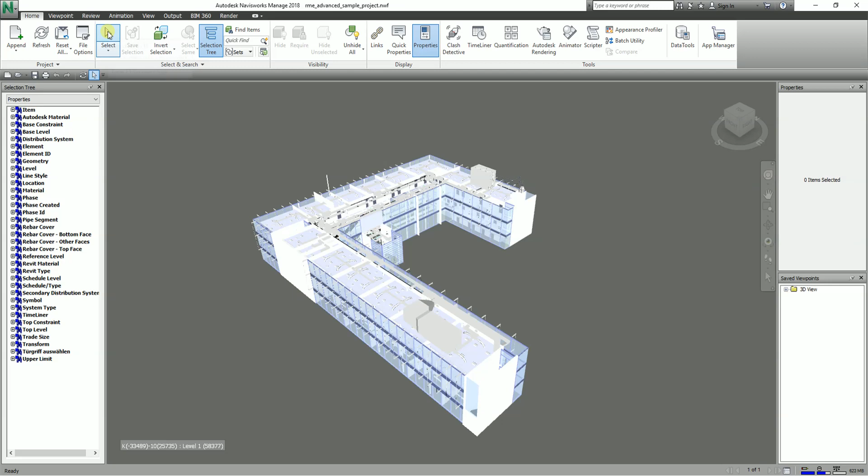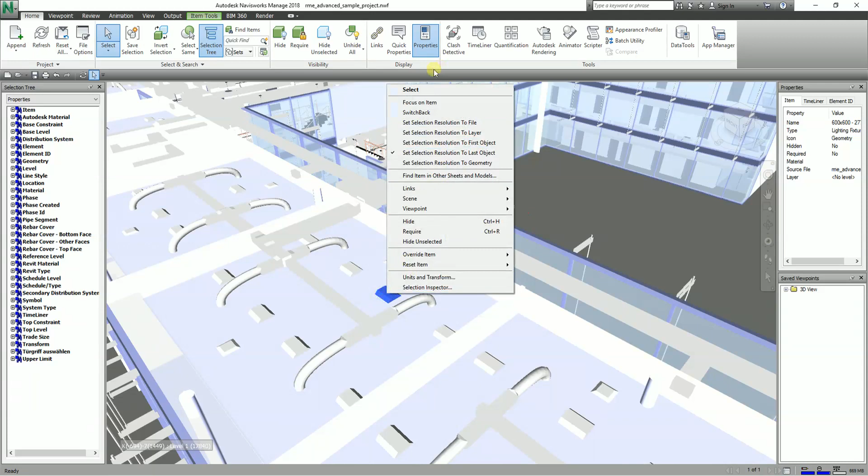The first one is Select. As you can see, Select is turned on. If you use that one, you'll be able to pick the objects one by one. Let's say I'm going to pick this, then right click. So there's the select there. If you want to select multiple elements, you can hold your Control key and then pick one by one.

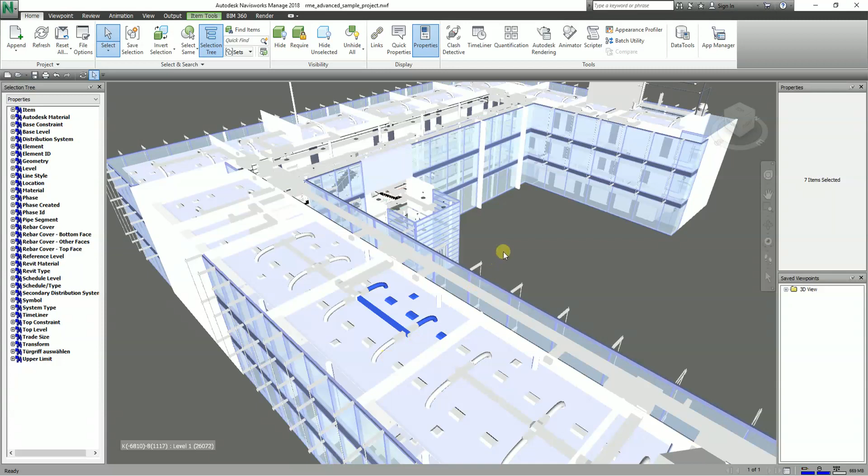Another way to select an object, aside from using the select tool which selects items with a mouse click, if you click the drop down arrow there's an option called Select Box. It selects items within a rectangular area. Let's say I want to select this area - I pick one point, drag, and release the left click. You'll be able to select the objects.

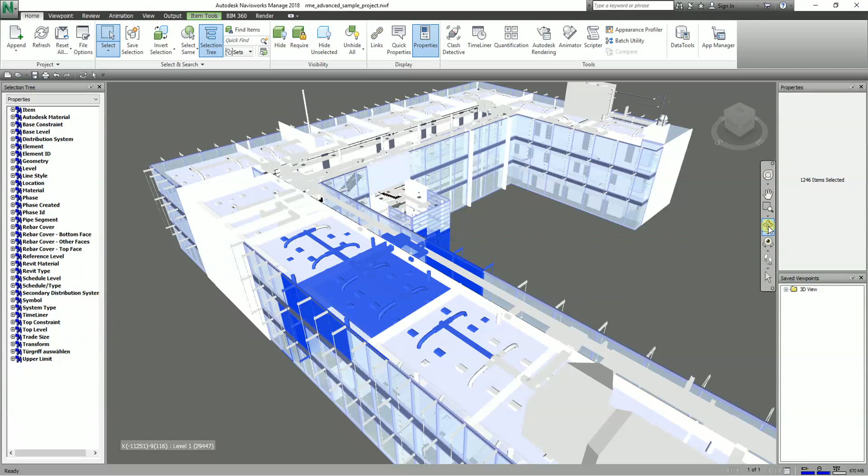I'll go ahead and select the Orbit tool to orbit my model, zoom out, orbit, and pan. Then I'll escape. Going back again, I'm going to click Select Box. Let's try again with this portion - I'm just going to drag like this. It's like AutoCAD.

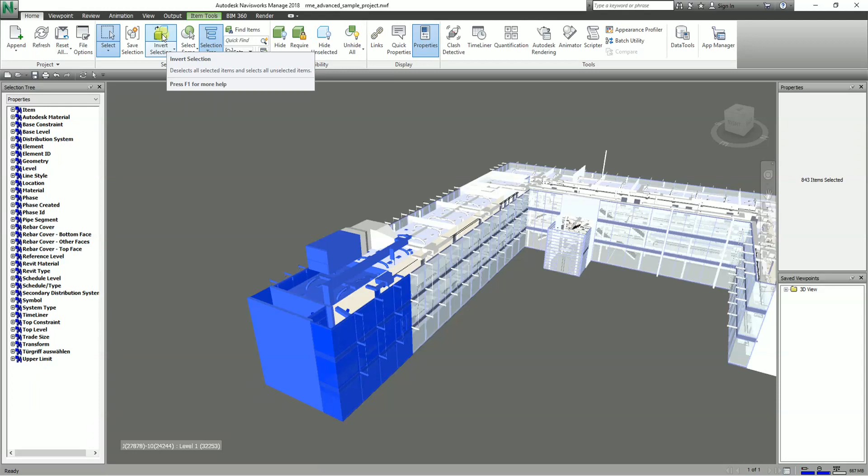There are other options here to select the object, like this Invert Selection option. It deselects all selected items and selects all unselected items. For example, the blue elements are selected. If I click Invert Selection, it will deselect all selected items and select the unselected ones. I'm just going to click this - you'll notice it selects all the unselected items but deselects the selected ones.

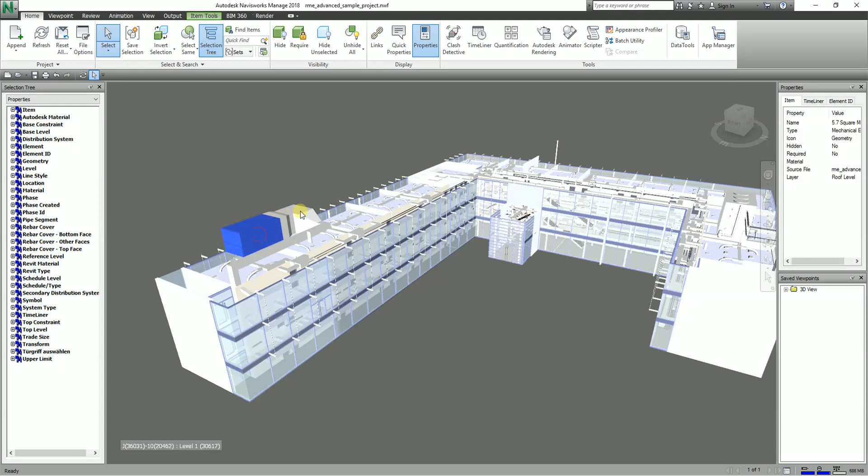Using the Select Box tool, you will not be able to pick one by one - if I try to pick, it doesn't allow me because this isn't the right tool for that. If you want to pick one by one, you click the Select tool. If you want to include other elements, hold the Control key and pick one by one. Then again, you can try Invert Selection.

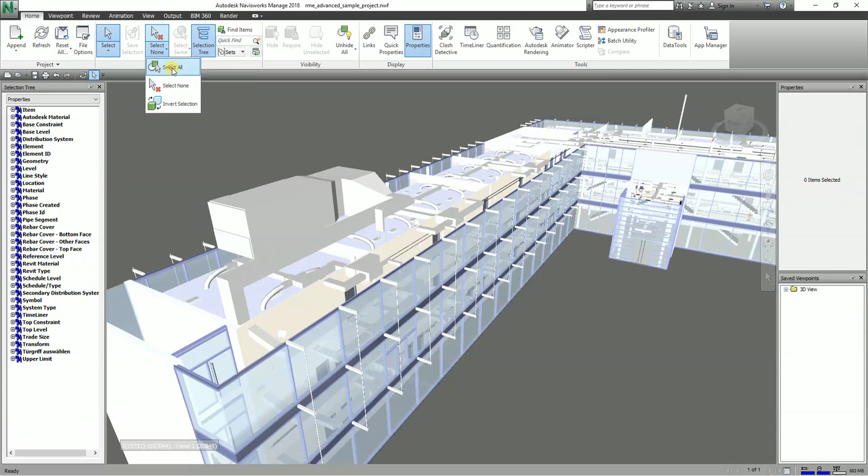You can also click the drop down arrow here - there's an option called Select None, which will deselect the object. Another option is Select All, so you can select all items in the scene if you want. If you want to deselect objects, you can select None, or simply press Escape.

Another option to select - let's say I'm going to select the Select tool and pick this one. By the way, you can go to the Home tab, Display panel. If you want, you can turn on Properties so that as you select an object, the properties will display for the selected object, just like the properties in Revit.

Aside from that, you can also use Quick Properties. You can toggle this on, so it displays property information in a tooltip style window as you move your cursor. Basically, if you turn this on and hover your pointer over an object, it will show you the properties of that object.

Okay, the item name is this one, 600 by 600 277. The item type is lighting fixtures.

Now, if you want to modify the quick properties, you can go to the application button, then options, and then interface. You just expand the interface, and then you can select quick properties there. You can expand this and click the definition to change this.

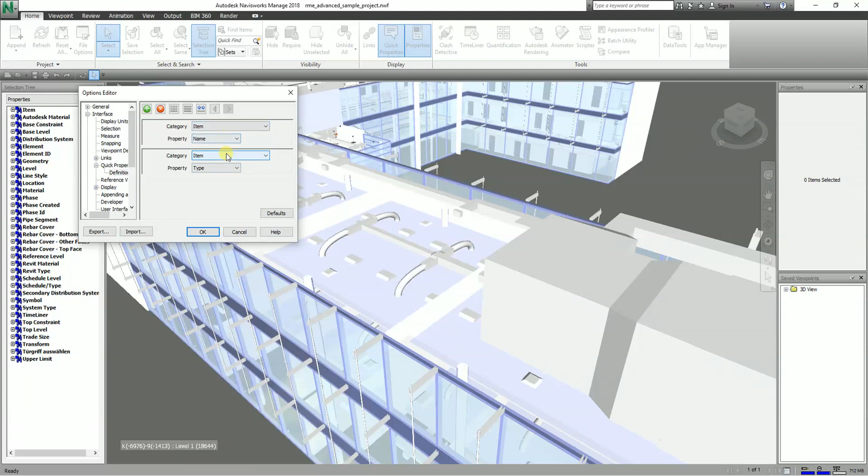Okay, so item and the name, item and then type. As you hover your pointer, these are the properties that will be shown. All right, so I'm just going to cancel this one, I'll just use the default settings.

Okay, so as you hover, for example here, it will tell you what is that. If this is toggled off, so if you move your pointer, it will not show you any property. Okay, now going back to selection, if I'm going to click this object here, this one, lighting fixture.

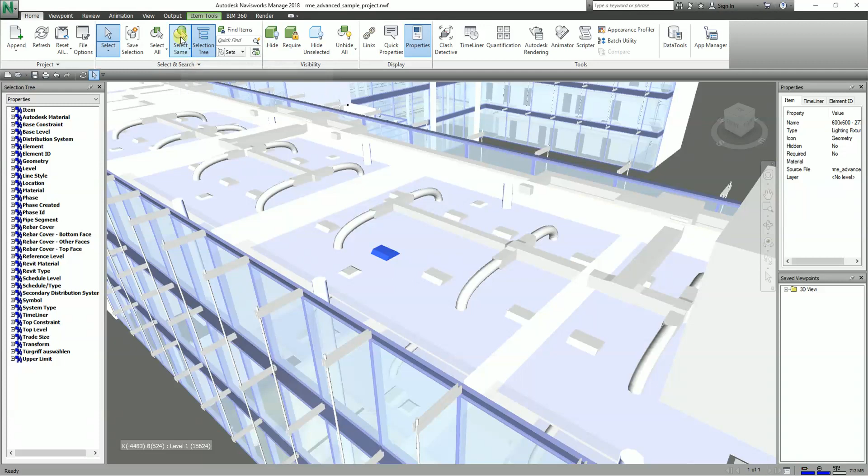There is an option here wherein you can change, like for example, you can select same. So I'm going to toggle this on. I click that, so it's toggled on. So if I click one element, toggled, same name. Yeah, there you go.

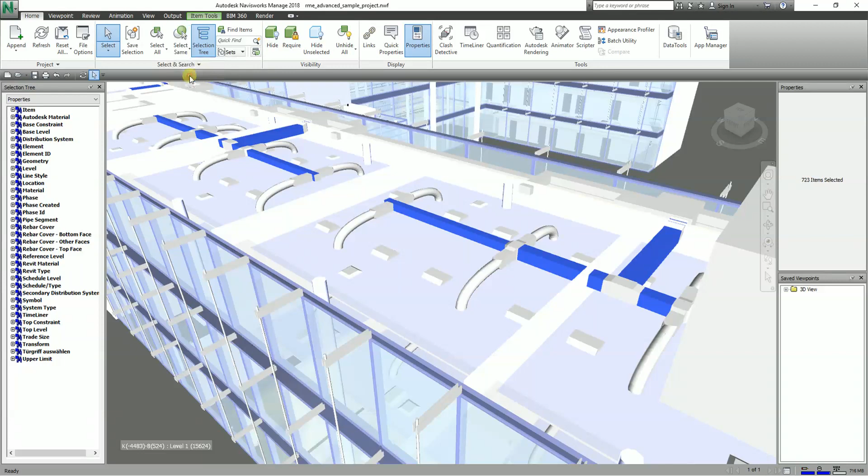Okay, so same name. The other option here is same type. Let me just escape. So let's say I'm going to select this, and then select same type, so it will highlight all the elements with the same type. The other one is same name, so it will highlight all the elements having the same name.

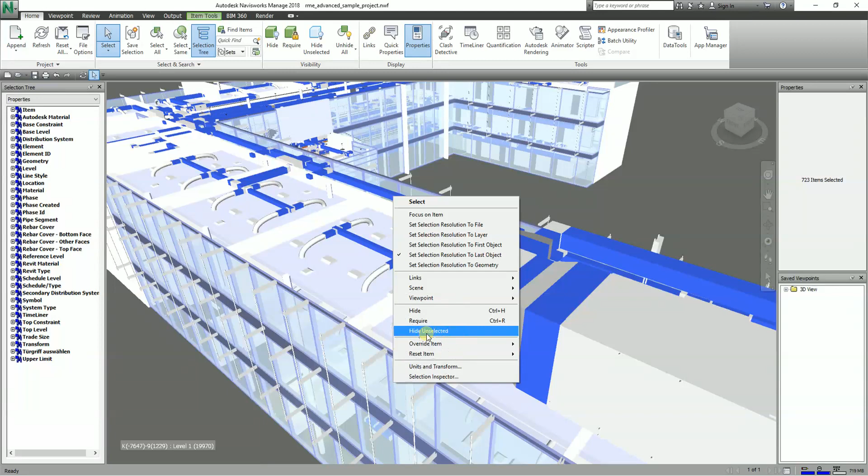Okay, so basically knowing how to select the objects is very crucial in Navisworks. Because let's say, oh, I want to separate all of these highlighted elements. So you just need to select and then right click. You have an option here to hide unselected. So if I click this, it will hide the unselected elements. You can see that it only shows you the elements with the same.

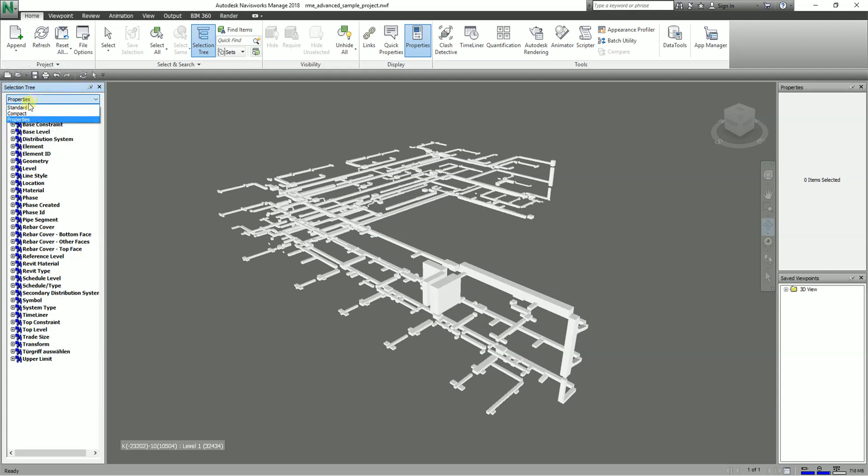Okay, now if you want to return it back, what you can do is you can change the selection tree. By the way, selection tree is here, home, selection tree. Okay, so this is the selection tree. You can change this to standard, so it will show you the project.

Okay, so you can right click that, then select here, hide unselected, hide, okay, and then where's the unhide? Okay, so this is the unhide button. So unhide all, there you go.

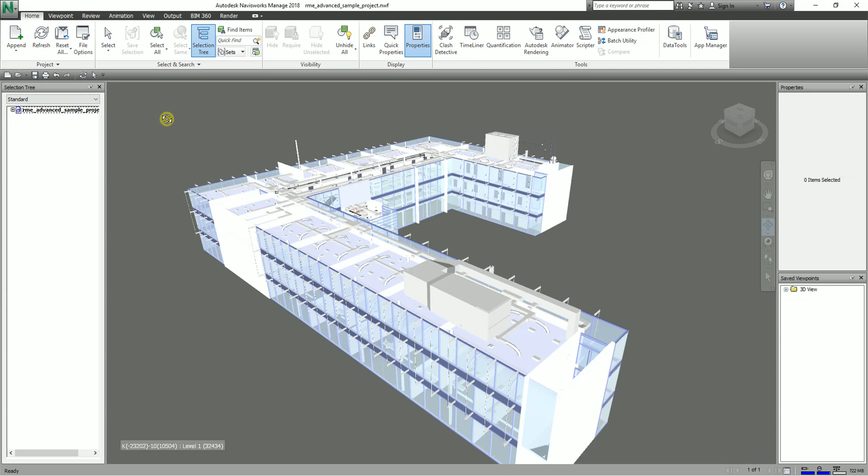Okay, so just escape. So aside from the option here, let me just open it, click again the select tool. So I click one. Okay, so there is an option here from the visibility wherein you can hide the object. There you go. Or you can unhide.

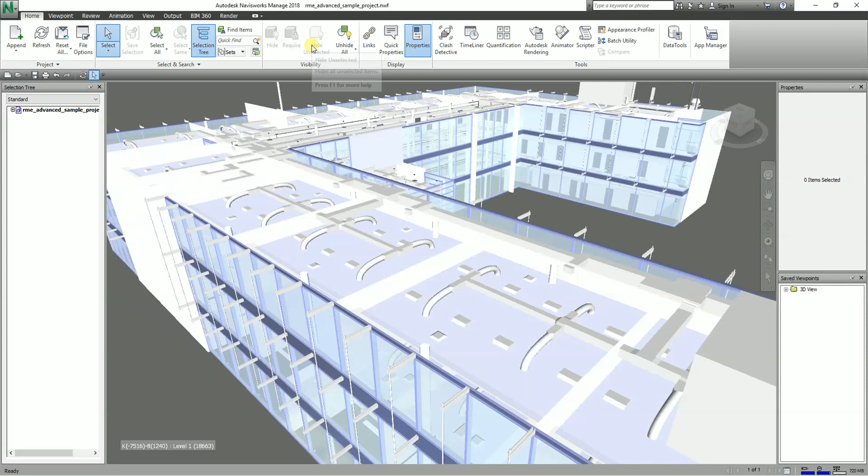Right? So from the visibility, okay, so we know this already. So let's say, what is this require? It forces the selected items to remain visible during interactive navigation, regardless of any performance settings.

So let's say, for example, I'll use here the selection box. I will select this portion here. Then after that, I'm going to require it. There you go. So you will notice from the selection tree, it also highlights what is those elements that is selected. You can see it's highlighted.

So if I'm going to select hide, okay, and this is hide unselected. So unhide all, there you go.

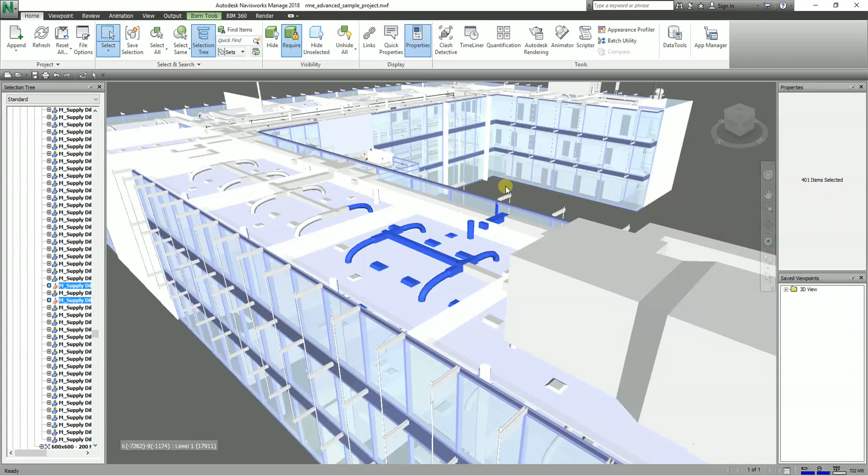Okay, so basically that's how you use these elements, these tools. So unhide all, and then unrequire all. So it makes all required items optional again, so that they are drawn according to performance settings. So if you select, you can hide, you can require. They are always visible no matter how you orbit your model.

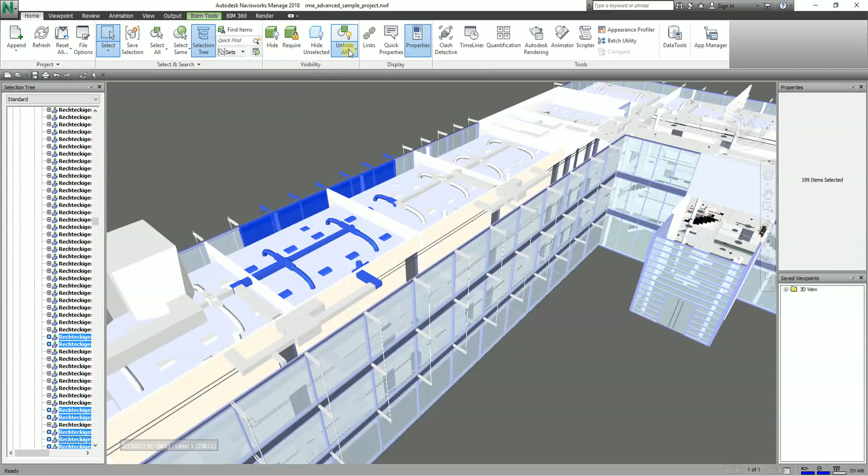Okay, or you can also hide unselected. The other one is unhide all and unrequire all. Okay, so these are the options that you can use to select the objects. Okay, now what else? Compact.

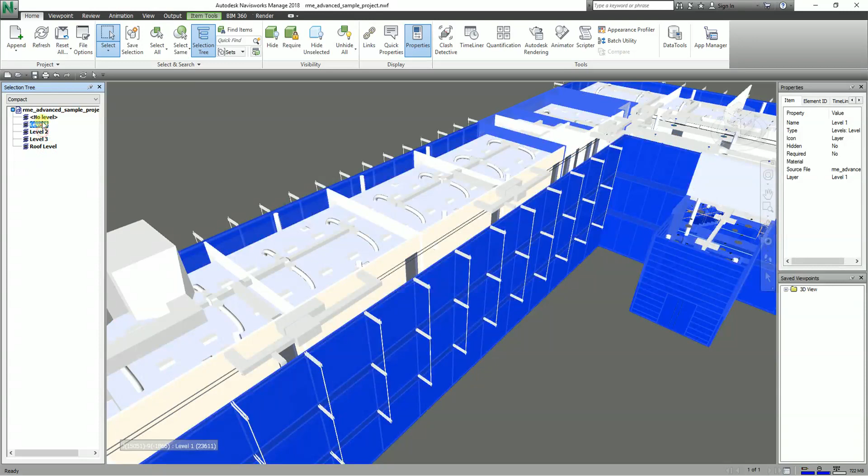So if I click the compact here, as you can see, this now is by level. The other one is by properties. Okay, so this is by properties, and then the first one is the default standard. Okay, this is standard. You can see here by level.

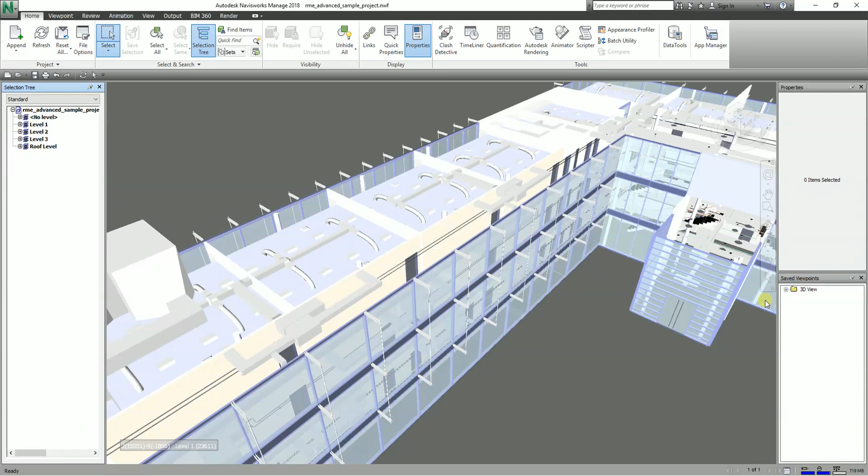If you have other link models in your project, you'll be able to see it here on the selection tree. Okay, so it's up to you how you want to select the objects. Being able to select an object in Navisworks using these multiple techniques is going to be very helpful in the future.

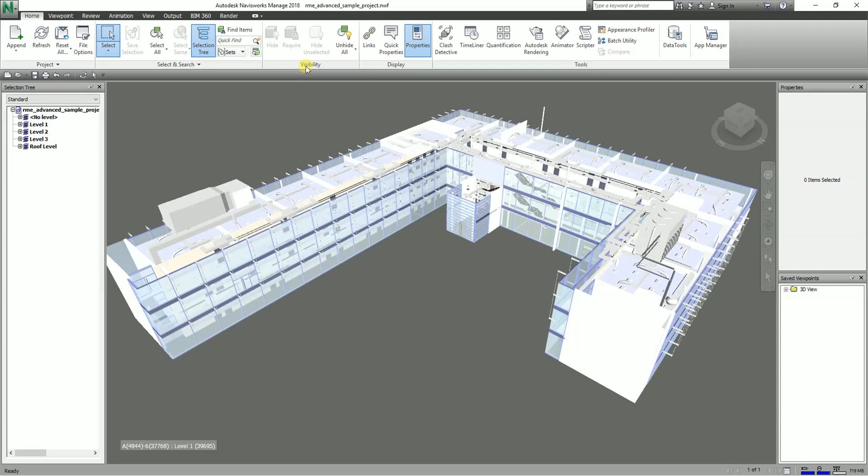Okay, so hopefully this video has been helpful to you guys about selecting the objects, using the selection tree, and using the visibility here. If you have any questions, comments, or suggestions, you can always put it on the comment section below and I'll get back to you as soon as I can.